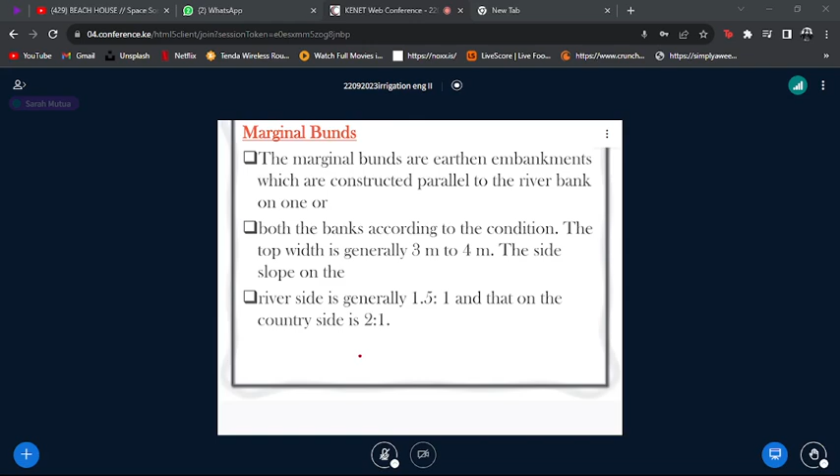And what we have here is some of the specifications that you need.

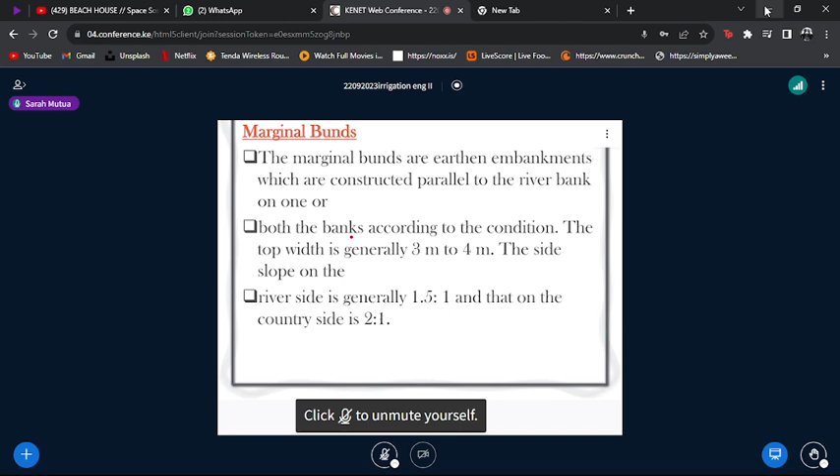You can consider typical specifications when you're constructing marginal bunds, and they serve a number of purposes: preventing floodwater from entering surrounding areas, which may be submerged or waterlogged. It maintains floodwaters within a specified section.

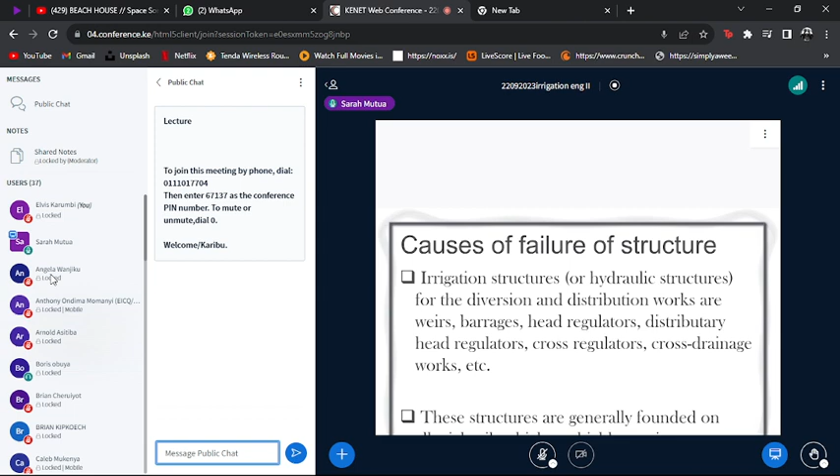The various hydraulics, and also try to come up with design parameters, or design aspects of this kind of structure.

Here we are only going to limit ourselves to the weir or a barrage, and we are not even going to do the structural design, but basically calculating pressures at various points.

Yes, and I want us to take a break so that when we come back, we can look at generally these causes of failure that are expected, because when we come now to the design part, we want to design so that we can minimize the effect that causes this failure.

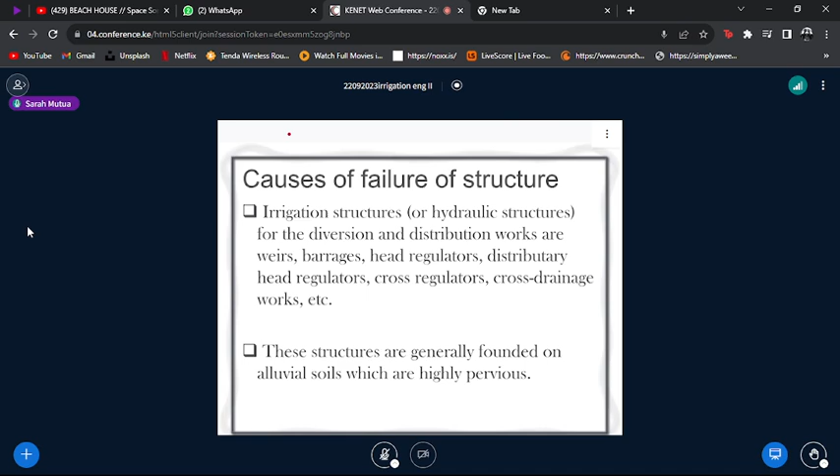So before we go, I want to check who is in.

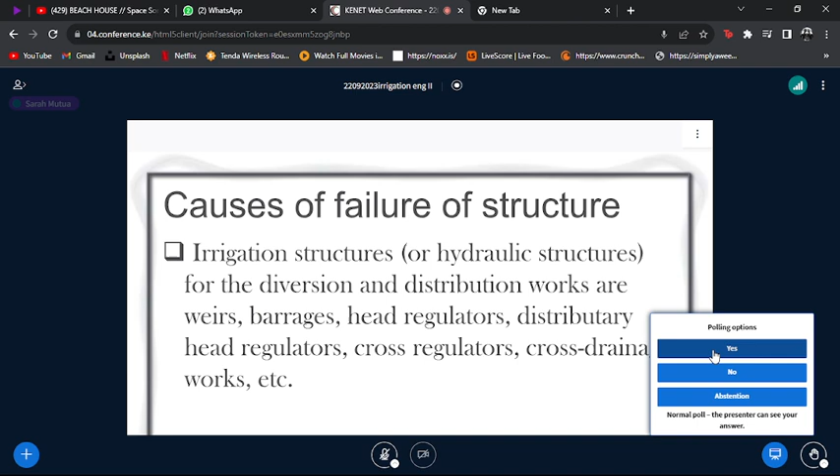So Boris Obuya and Victor Kariuki, where are you? Boris Obuya, Victor Kariuki, are we together really? Victor Kariuki, he's sleeping. It was, I'm present. You are present. So why aren't you? Anyway, let us meet at 8:20 or even 8:30, so that we can now come and look at the various sources of failure and so forth.

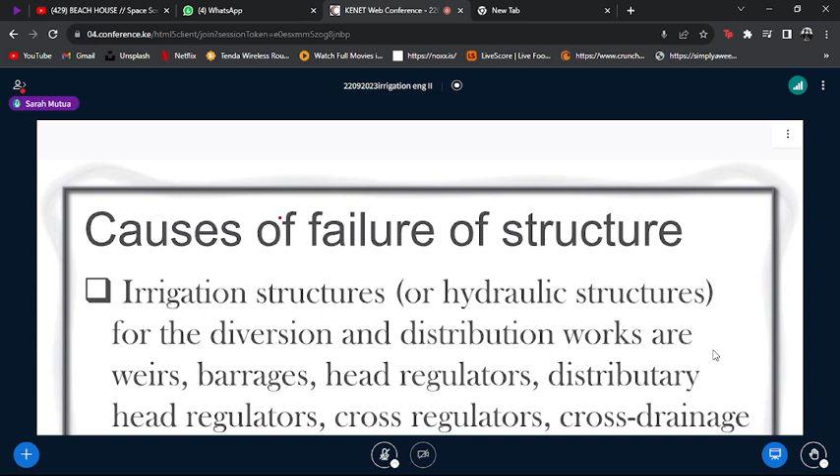So we are now to look at the causes of failure of the structure. One thing that should be at the back of our minds: we make weirs and barrages in floodplains on porous media.

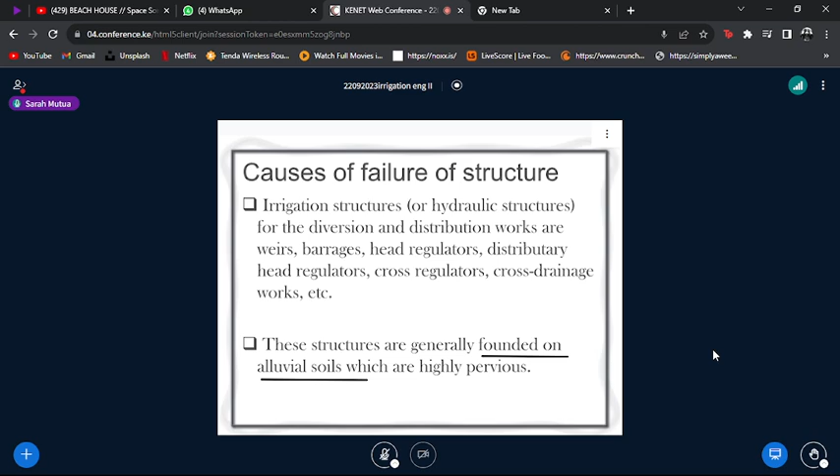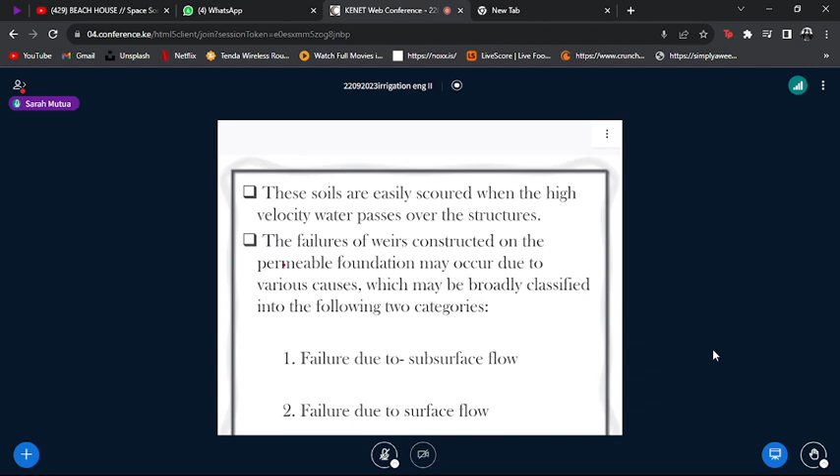So they are founded, or rather, when we say they are founded on alluvial soils, that is, the foundation is alluvium. Now, one characteristic of these kinds of soils is that they are easily eroded when we have very high velocities as the water passes over the structures.

And again, the failures, and again, we have a lot of seepage beneath those structures. There are two broad categories of the modes of failure of weirs and barrages.

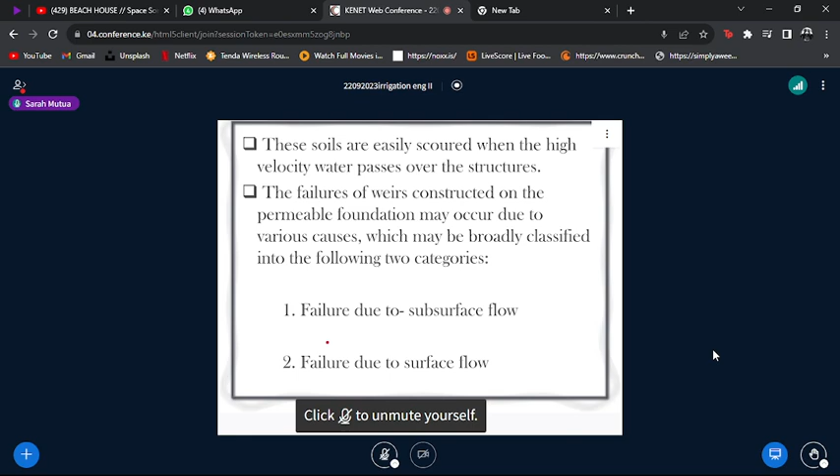One is due to subsurface flow, and secondly, due to surface flow. Before I continue, I will just list and generally explain the subsurface flow and surface flow failures.

One, due to subsurface flow: if you remember soil mechanics, the effective pressure at any point within a soil layer is a function of the pore water pressure and the matrix pressure.

Now, pore water pressure, in soil mechanics, we usually consider, when we are talking about pore water pressure, we are talking about saturated conditions. In this kind of scenario, we also expect saturated conditions, because we are talking about the ground or a layer of soil below the structure where a river passes on top, so chances are that you have saturated conditions below the structure.

So this pore water pressure, or the total effective pressure, determines if a particular foundation is able to carry the overburden. In this particular case, we have added an overburden in terms of the structure. Most of the time this structure is concrete, so you have added another weight of concrete on top of the existing ground structure.

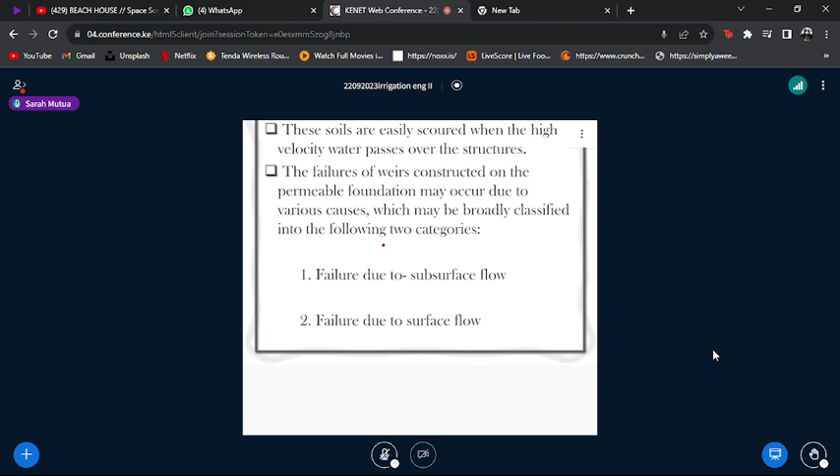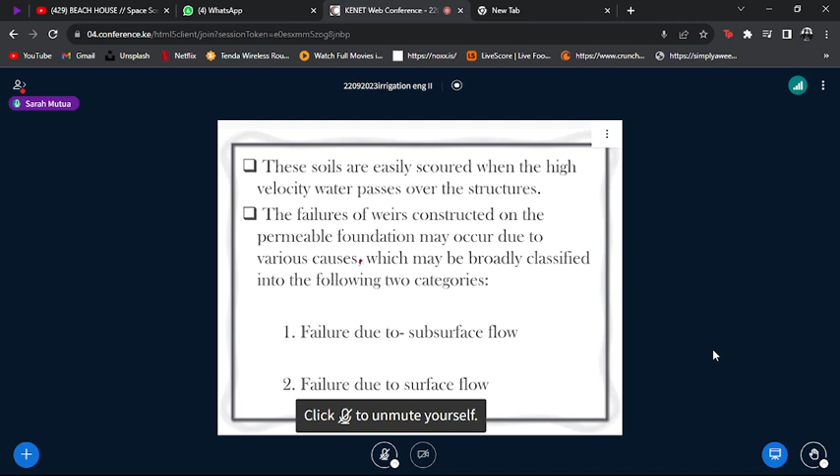Another thing about surface flow is erosion, bed erosion basically. Normally, when you're given a specific type of soil, there is a maximum depth of erosion that can occur. For example, if you have a silt with a certain D50, a certain mean diameter, you'll find that the maximum erosion that can happen at that particular point is maybe, let's say, 1.5 meters, 2.5 meters, and what have you. So those are the four kind of scenarios we are going to be checking.

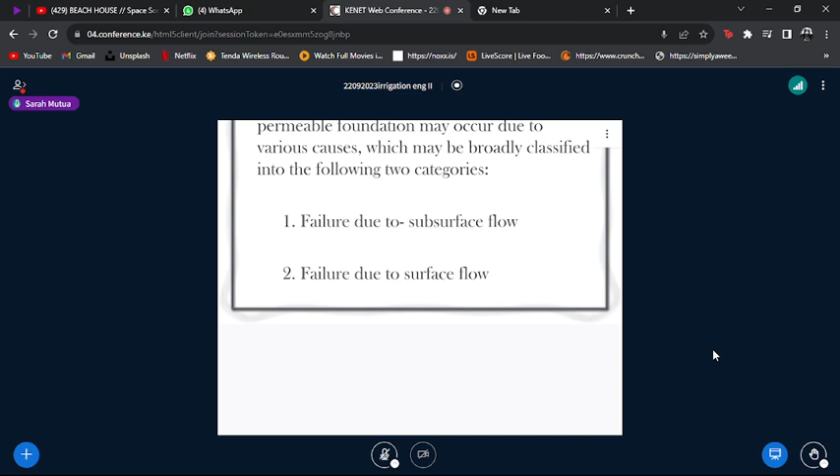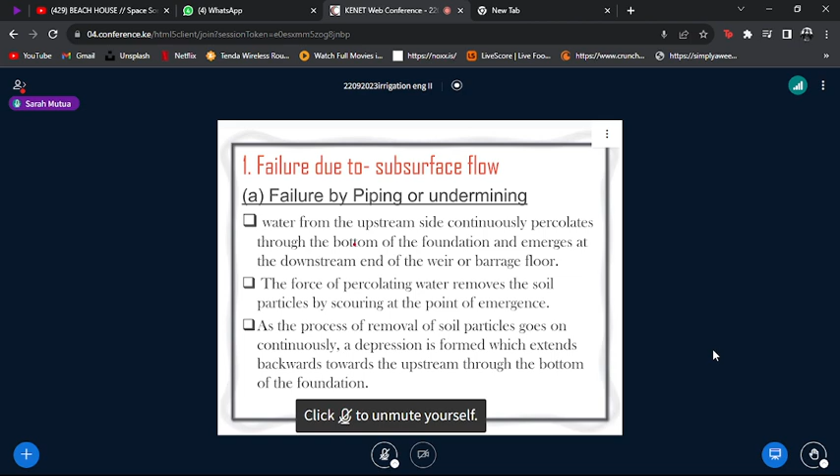Because once we check this, we will further look at the design aspects that follow. So first, we have failure by subsurface flow, and we have failure by piping or undermining. Like I've already explained, water from the upstream side continuously percolates through the bottom of the foundation and emerges at the downstream end of the weir or barrage floor.

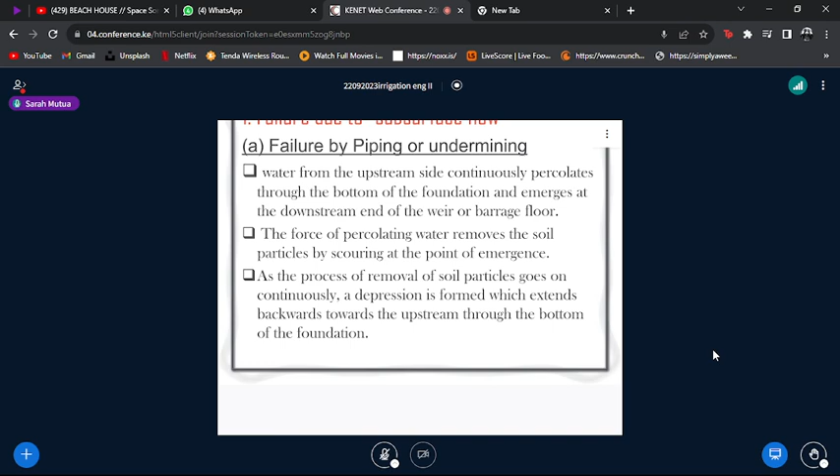Now remember, for any flow of fluid to occur, and this is either from fluid mechanics or hydraulics, you have to have a kind of gradient developing. You cannot have a flow of water when you do not have a gradient developing. When you do not have a gradient, remember, water flows due to mechanical energy. That flow of fluids is controlled by the mechanical energy, that is, differences in mechanical energy. Before I go further, I want to show what I'm talking about.

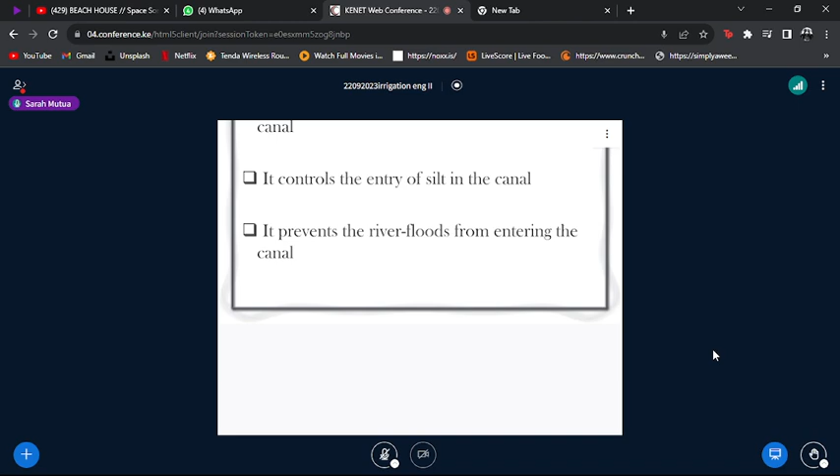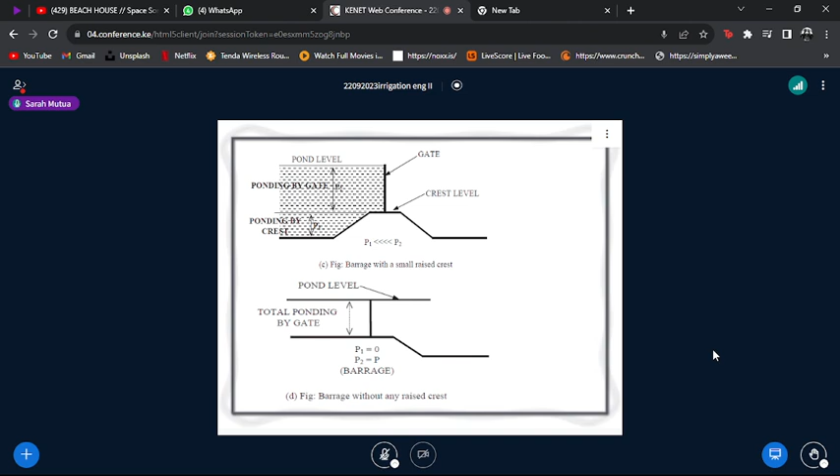Even in a natural channel, water follows a certain slope, and water flows from a region of high energy to a region of low energy. This energy, usually called mechanical energy, can be described by the Bernoulli equation, which has three terms: the kinetic term, the gravitational term, and the elastic energy term.

The elastic energy term is the one we calculate as the pressure term, defined by the density and depth of the fluid, rho GH. The kinetic energy is the one controlled by the velocity of flow. And then we have the gravitational, or potential, term that is related to the elevation of that fluid.

So now, in this particular case, this is the upstream side, and this is the downstream side. You are going to have a very high water level upstream and downstream. And if I was to draw the tentative water level downstream, once the water flows above, you are going to have such a water level.

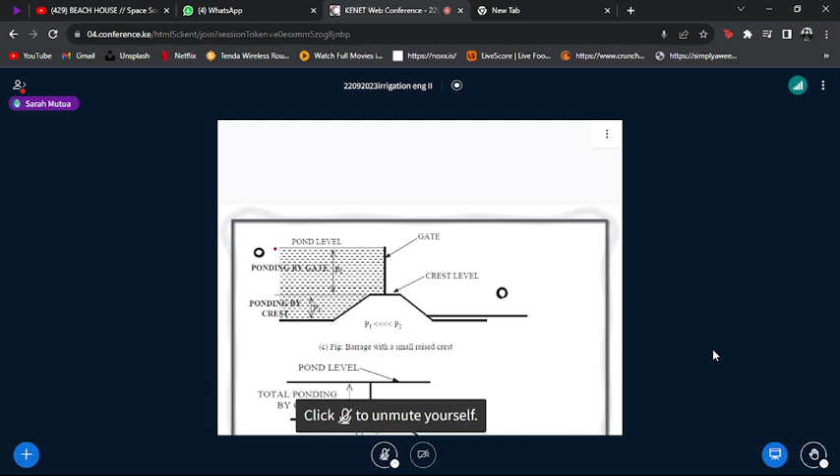So if you calculate that mechanical energy, remember it can be expressed in terms of water potential, or energy potential, or hydraulic head. If you change it into hydraulic head, which is basically the elevation of the water, you are going to have a very high hydraulic head upstream and a low hydraulic head downstream. Because of that, you have some kind of hydraulic head gradient.

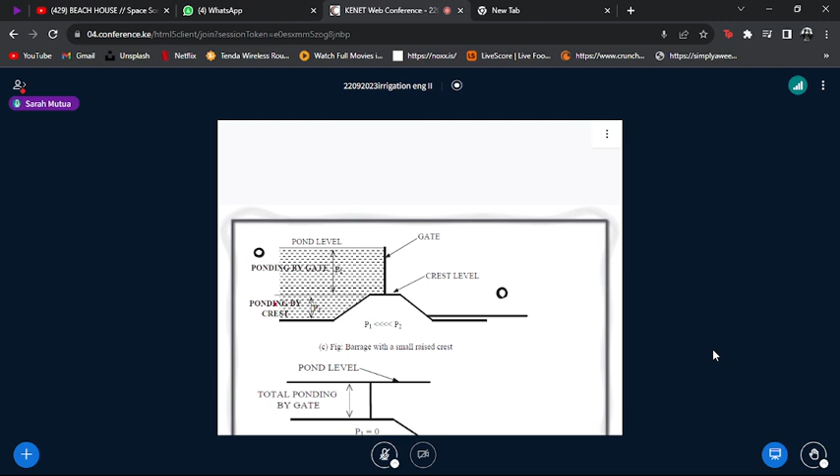And that is what causes the water to seep beneath. We have high head here, we have low head there, and the water will have a tendency to flow. It cannot flow through the weir, so it flows through the porous media beneath. So we go back.

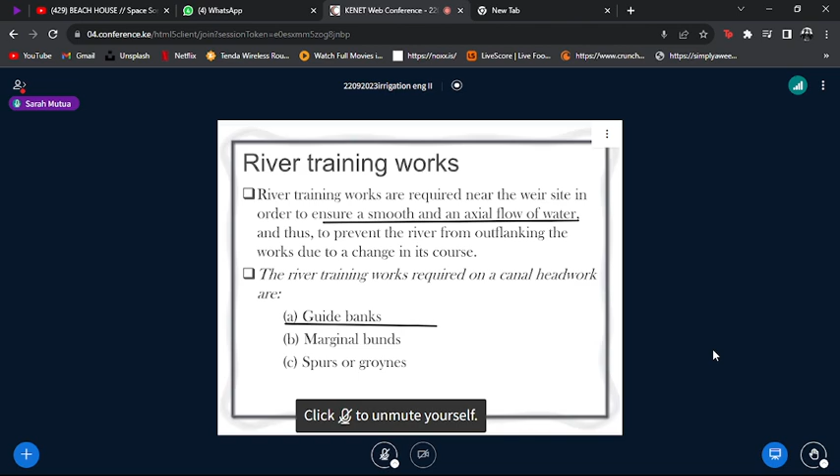The piping and undermining: we are talking about water from the upstream side continuously percolating. Why? Because of that difference in hydraulic head, we are going to have constant percolation beneath, and that water emerges at the downstream end of the weir or barrage. So the force of the percolating water can remove soil particles by scouring at the point of emergence.

So when the water emerges downstream, if the forces are high enough, you can have erosion of the particles below. As we shall see later, the essence is to ensure that the forces beneath do not have enough energy to carry those soil particles. As this process of removal of soil particles goes on, you get a kind of depression forming, which extends backwards.

We will see all this in detail a little bit later using a diagram. So in this depression, you have kind of a pipe forming from the downstream end. The erosion starts from the downstream part. Some particles are eroded away, and then we have continued erosion through that section, forming a kind of pipe that propagates from downstream to upstream.

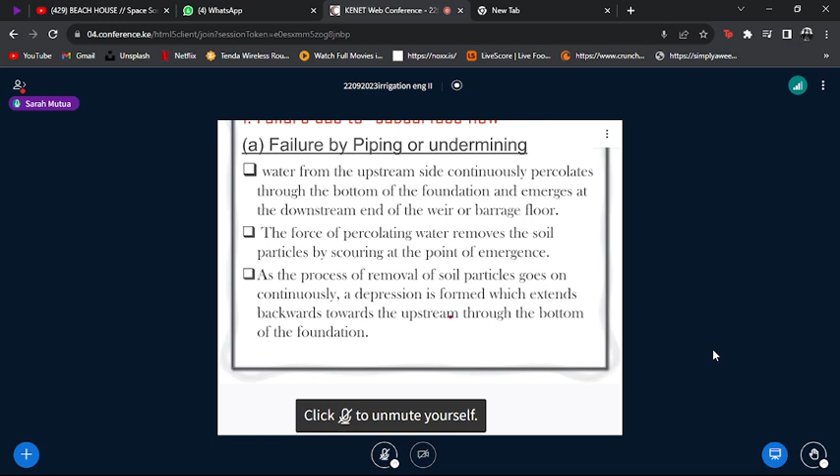This phenomenon is called piping or undermining, or failure by undermining. That piping can extend all the way until it gets to the upstream part, or even to a point where your barrage does not have a foundation below it, and your structure is going to fail because of that.

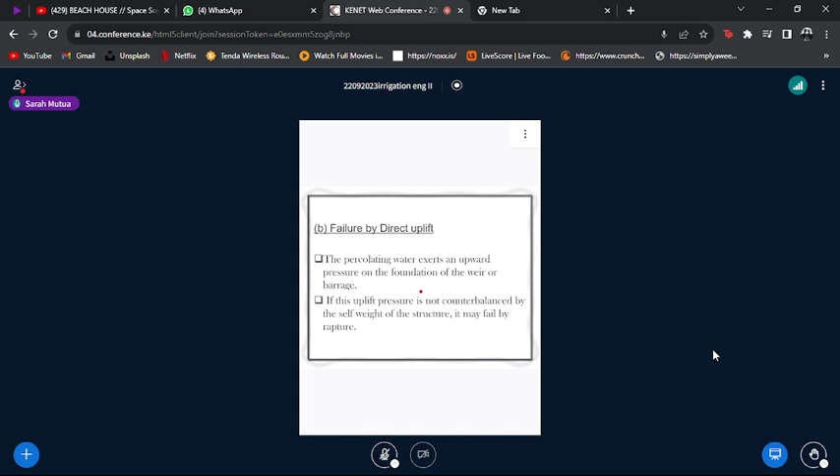Then we have failure by direct uplift. This percolating water exerts an upward pressure on the foundation of the weir, and if this is not counterbalanced by the self-weight of the structure, it can fail by rupture.

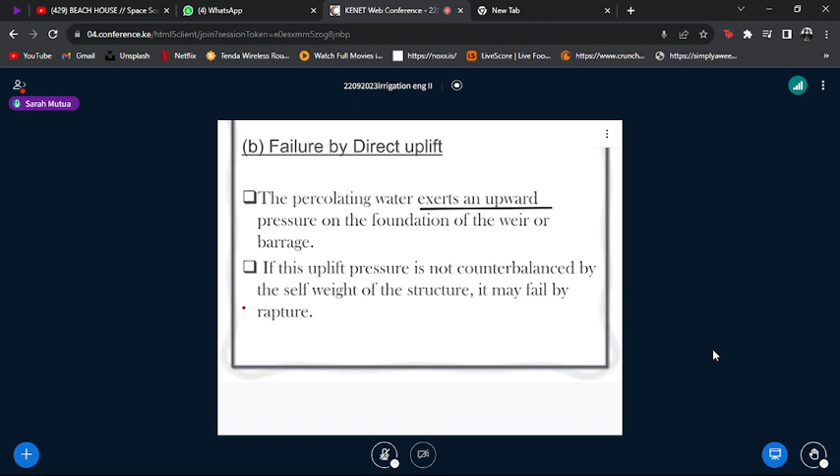Then we have failure due to surface flow. One is by the hydraulic jump I mentioned. This happens because we have water flowing at a very high velocity as it flows on the downstream slope of the weir, but then it comes and meets slow flowing water where the slope is flat. That is what causes the hydraulic jump.

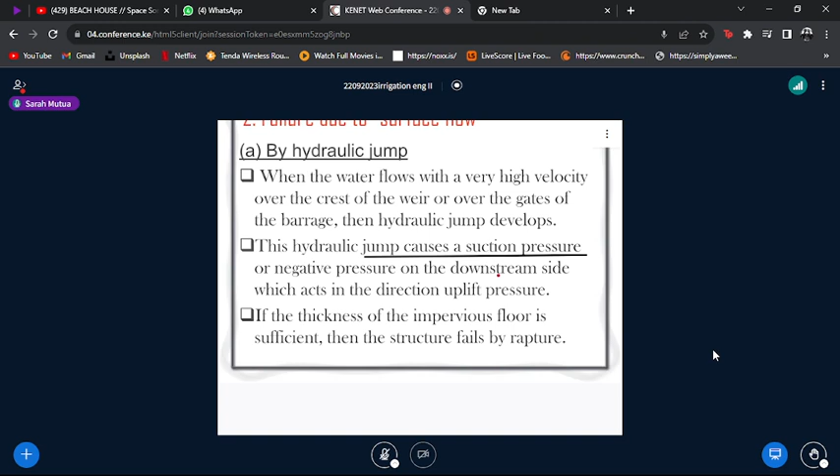I mentioned briefly that the hydraulic jump causes suction pressure or negative pressure. I know you have done hydraulic jumps in hydraulics, so once you do the hydraulic jump you can easily calculate the uplift pressures associated with it. In this course we will not go into those details, but they are usually very important when designing the weir or barrage. You have to calculate the position of the hydraulic jump and design to counteract that effect.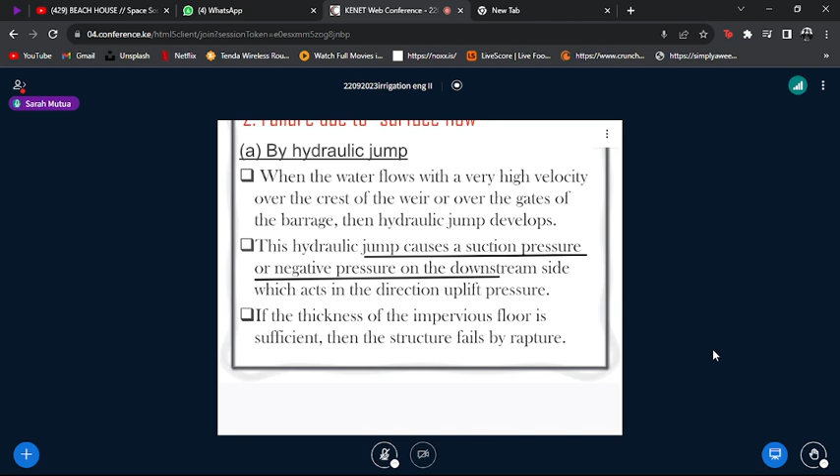So if the thickness of the impervious floor is insufficient, the structure is going to fail by rupture. The second way you expect failure due to surface flow is by scouring, that is erosion. Basically, when water is flowing in a porous media in unconsolidated soils, you're going to have erosion, exposing your foundation, and the structure, not lying on any foundation, is going to fail.

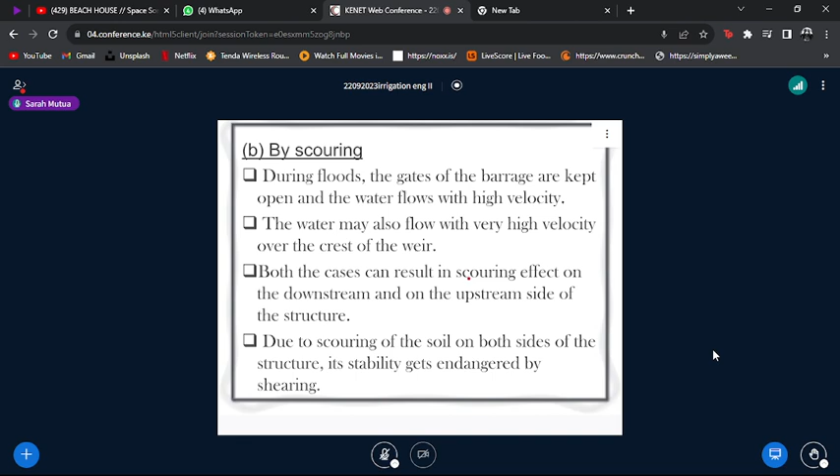So what are the design aspects, therefore? For the subsurface flow, we have a number of provisions, and also for the surface flow, we have a number of provisions.

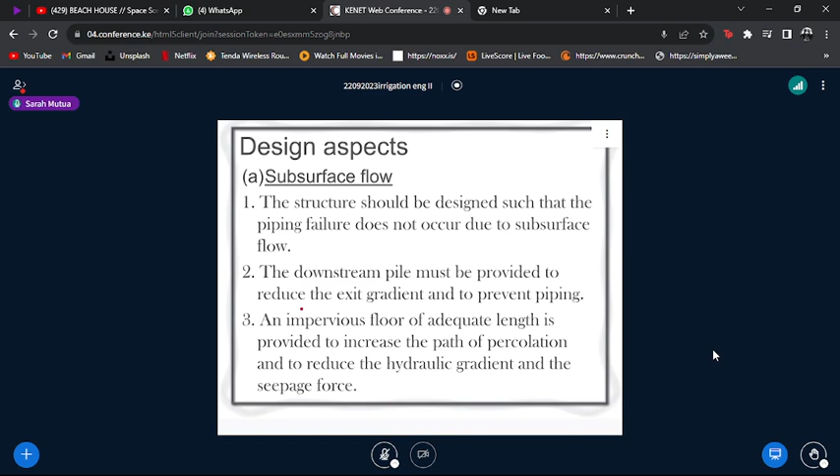So when it comes to the subsurface flow, the structure should be designed so that piping failure does not occur due to subsurface flow. Normally, as we will see later during some design principles, a downstream pile must be provided to reduce the exit gradient and prevent piping. So in the downstream part of the barrage, you provide a downstream pile.

Secondly, we provide an impervious floor of adequate length to increase the path of percolation. As I showed, we develop some hydraulic head difference between the upstream and downstream. If the distance between the two water levels is shorter, you get a very high hydraulic gradient; if you make the distance between the upstream and downstream water levels longer, you get a lower hydraulic gradient. So one design aspect is to make the floor of the barrage very long, so that the path of flow of water is also long.

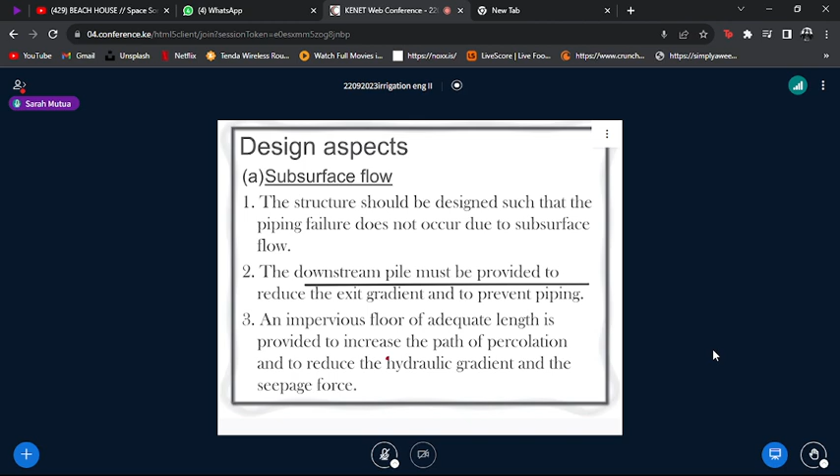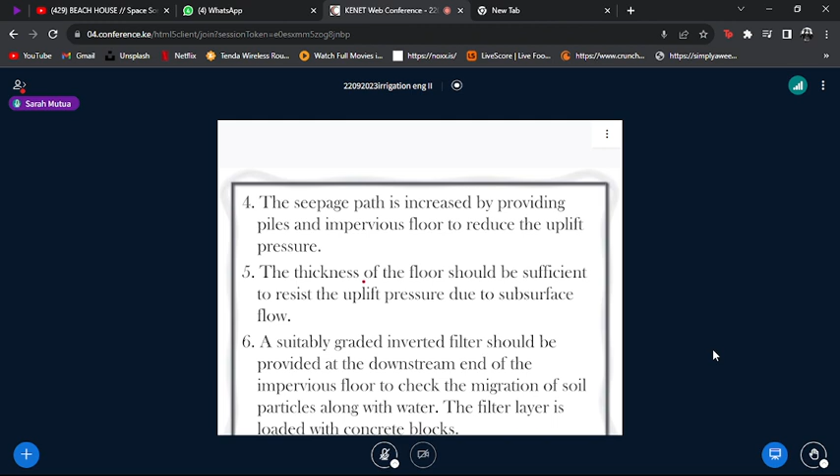Again, the seepage path is increased by providing piles and impervious floor to reduce the uplift. So you find that in addition to the downstream pile, and when I talk about a pile, I'm talking about a concrete wall that runs from one side of the riverbed to the other side in the foundation. So you have another pile, maybe somewhere in the middle, another one upstream, just to continue increasing the length of flow of the water.

We'll see how that happens when we start discussing the theories. Then we have the thickness of floor, which should be sufficient to resist the uplift pressure due to subsurface flow. So you need a minimum design thickness, and there are ways to determine that.

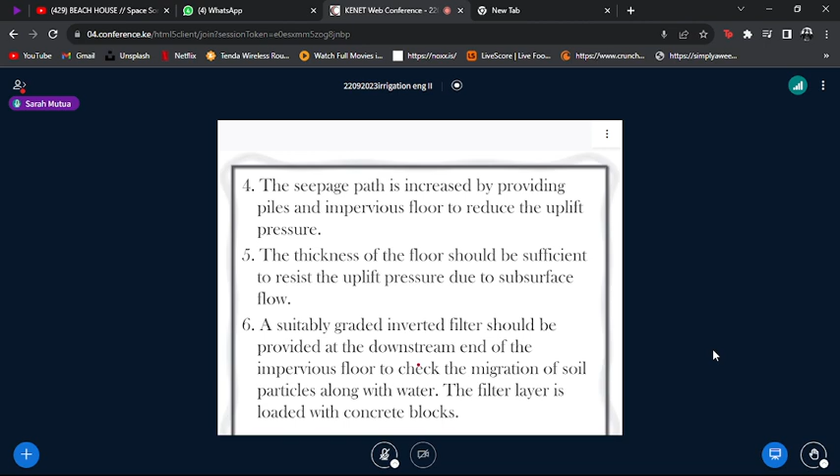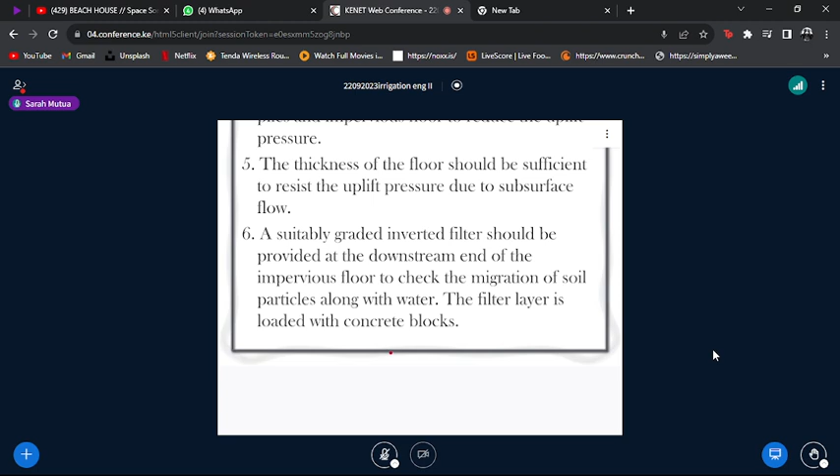Finally, you need to provide a suitably graded inverted filter at the downstream end of the impervious floor to check the migration of soil particles along with the water, preventing soils from leaving the subsurface. Here we are talking about an inverted filter, just like in slow sand filters or rapid sand filters, but inverted so the gravel is on top and the graded sand is at the bottom. You provide it at the downstream part where you expect the particles to leave, to flow out of the subsurface.

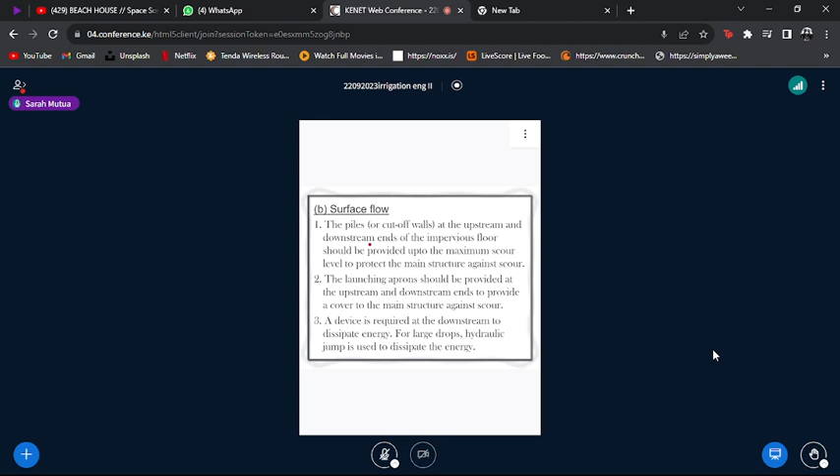Then we have design considerations related to surface flow. One, you provide piles or cut-off walls at the upstream and downstream ends of the impervious floor, up to the maximum scour level. I mentioned that for any soil particle, there is a maximum expected scour depth, and even when doing bridge design or design of structures in such areas, there is that maximum scour level. So the piles you construct have to be at least that depth.

Two, you need launching aprons at the upstream and downstream ends to provide a cover to the main structure against scour. First you provide a concrete structure, maybe a wall sloping from the structure, so that when erosion occurs, it does not reach the piles of the barrage and weir. We will not cover launching aprons in detail, because if we were to do everything, we would never finish this course. We would only concentrate on designing weirs and barrages.

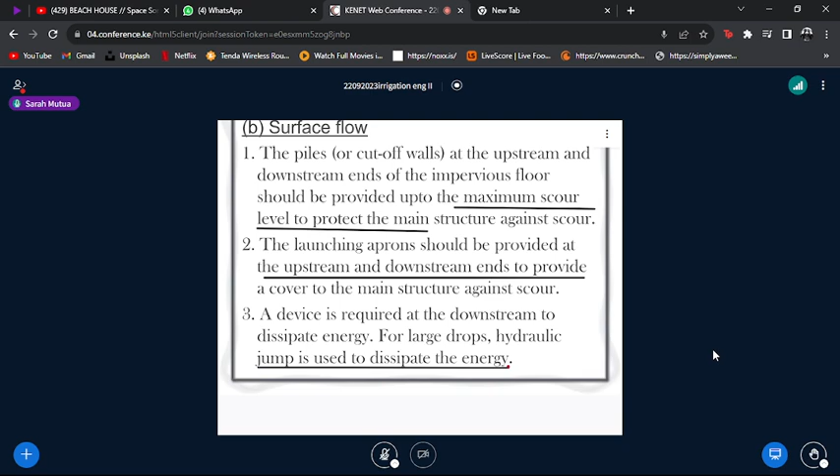Then we need to provide a device downstream to dissipate energy. What normally is done is you design for a hydraulic jump, specifically designing for it, so that I need a hydraulic jump here, and you design for it.

Further, you provide additional thickness at the point where the hydraulic jump is formed, to counterbalance the suction pressure. You will see in most of the figures that the downstream wall of a weir or barrage is usually thicker than elsewhere.

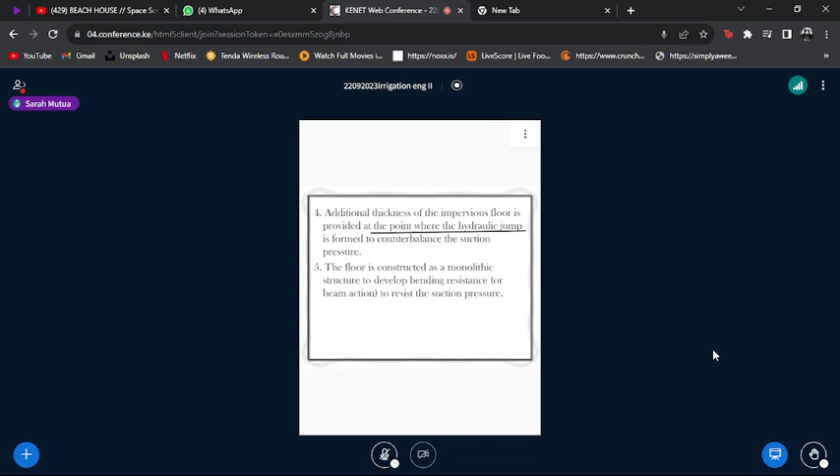Then the floor is constructed as a monolithic structure to develop bending resistance or beam action to resist suction pressure. The same way we do beams and columns in a building's skeleton, the idea is to make it monolithic so that you create bending resistance, beam action. Even in buildings, you have columns, but you have to connect them so it becomes one continuous structure. So the network of beams and columns is usually monolithic. That is the essence here: when making your weir and barrage, to increase bending resistance, you make it one structure, so the bed, the piles, the barrage itself, and the superstructure are all just one single structure.

So next week, I think Monday, we should look at the theories that have been applied to design for the various design aspects we have stated.